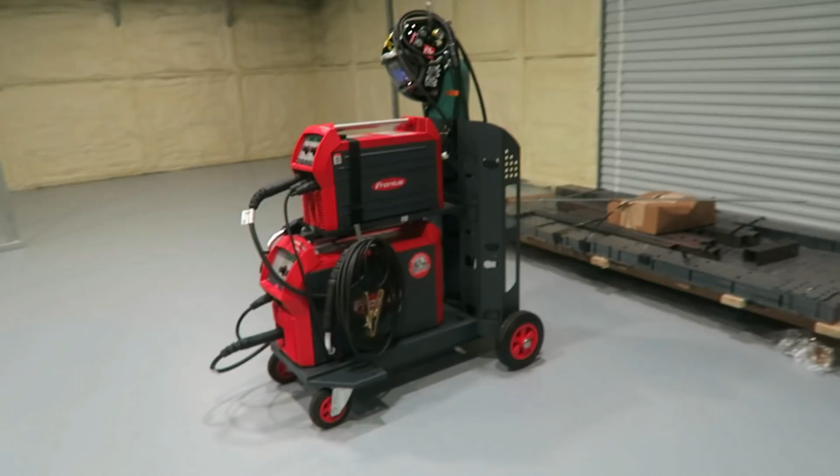So I've got two of the MIG machines in. That's mainly because I plan on putting this thing together.

I have finally unwrapped the welding table. One of the things you'll see when I put this thing together - obviously that'll be a separate video - but I had this thing specially made. The legs on this are only 30 inches tall. No, the whole table itself is only 30 inches tall, so it has really short legs. I did that on purpose - I kind of wanted a low table, something you could sit at and weld.

I also wanted that because I really plan to use this more as a chassis jig. I'll probably build ends for it - ends that come off one side for front suspension, and a whole other jig that comes off the back side for rear suspension.

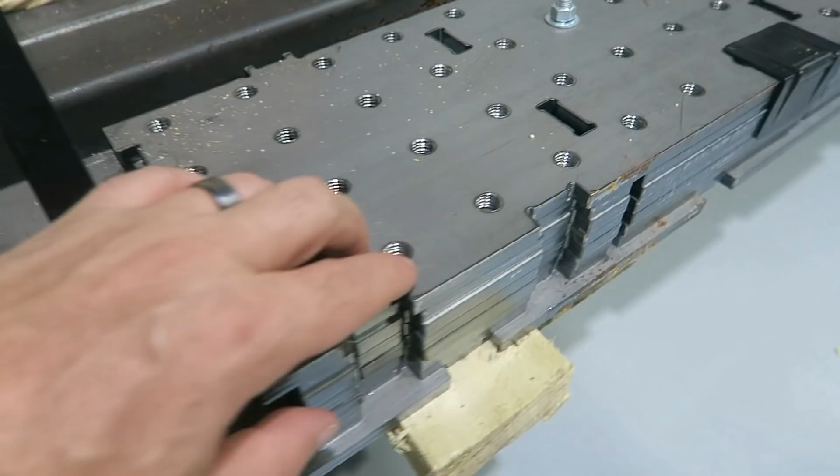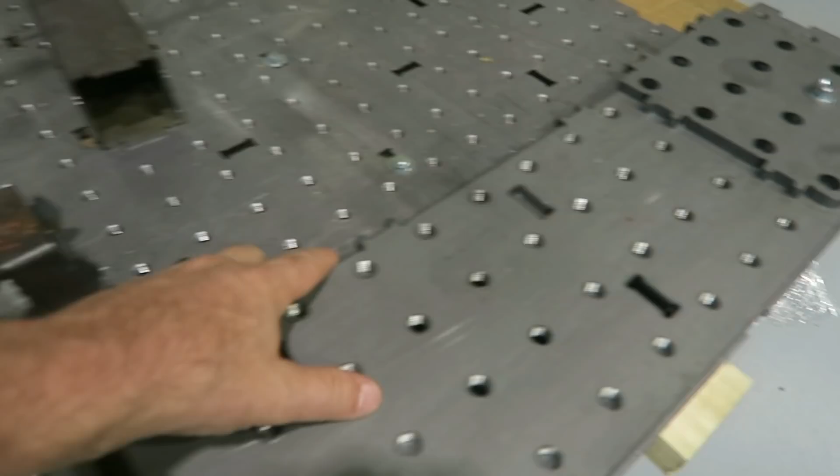The other thing I custom ordered on this thing is everything is drilled 1/2 inch thread. You can see that just about every hole on this thing, other than some of the plates that go on the bottom, is all 1/2 inch thread. See, there's one of the legs.

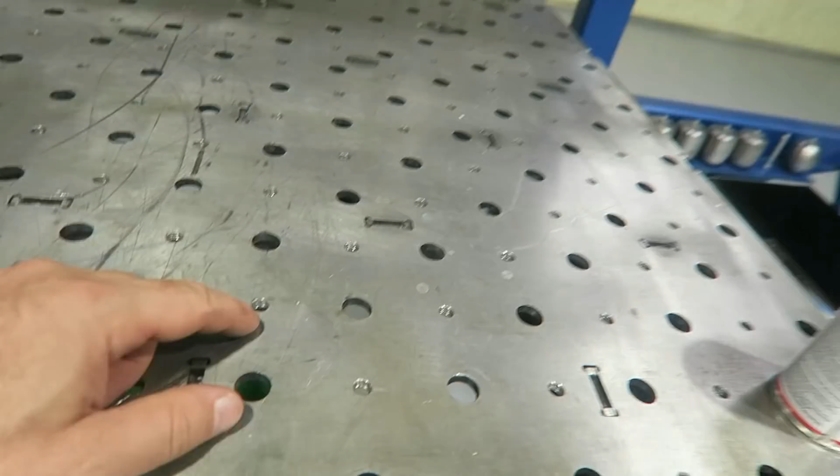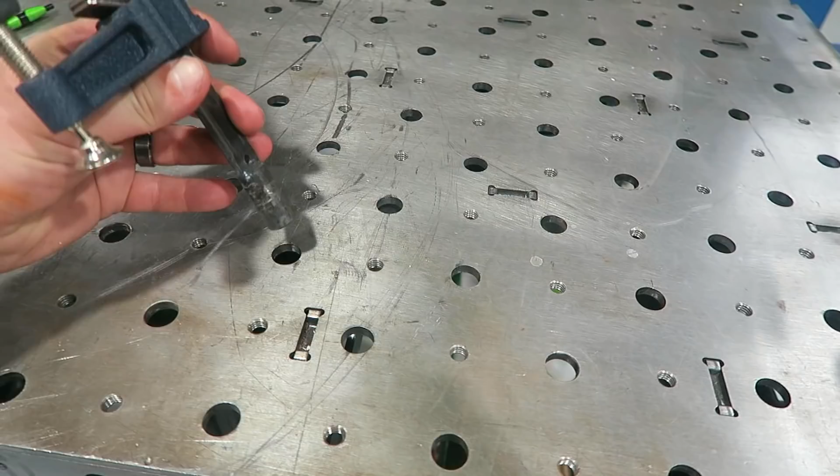Versus the other welding table, which is threaded and has these 5/8-inch dowel holes. Now the dowel holes make sense because when you're using speed clamps, these things just slide right down in there, and as you tighten that clamp, it kind of binds in that hole. They work really well - I like it for this table. I actually use the speed clamps more than anything else.

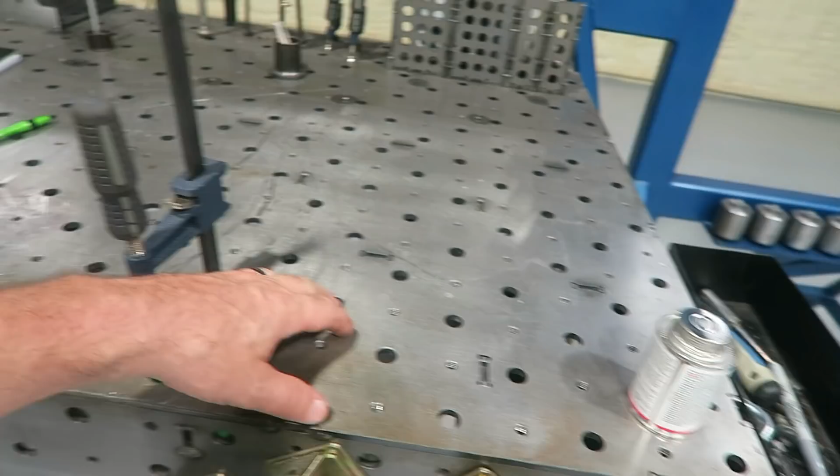But because of the nature of that table, I didn't necessarily want that. I wanted everything to bolt and mount - I can fasten stuff, fasten jigs, clamp tubes in there, all that kind of stuff. I want everything to bolt together, so that's why I ordered it all thread.

What else? Got lots of stuff. Even though it doesn't look like lots of stuff, I got like half of the other shop in here already. I'll get to that in just a second.

One of the things I wanted to show you is I got a dehumidifier in here.

So basically what you want is to maintain anything under about 80% humidity. That way you can combat surface rust on bare metal stuff. So I got this, it'll be a main staple right now. I just got it on the floor, but I'll build a permanent home for it. I've already got it draining outside, so you can see it just drains right out there. I've got it set to kick on at around 70 or 75% humidity right now.

The other thing that's rad about this shop, that I knew but didn't think would be this good, is it can be 80 degrees outside, and the way this foam insulation seals the place up and insulates it, the concrete keeps it cool in here. I need to get a thermostat to check the temperature, but I'm guessing it stays in the 70s all the time, no matter how hot it is outside, as long as the door's shut. It's like a nice, comfortable 75 degrees in here.

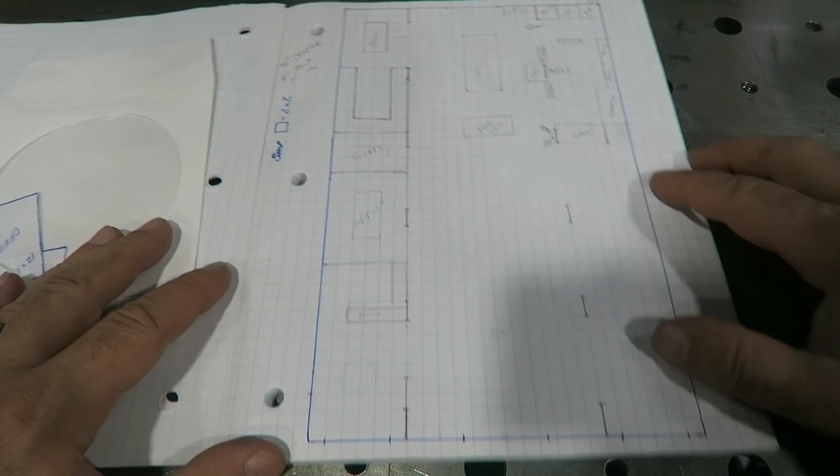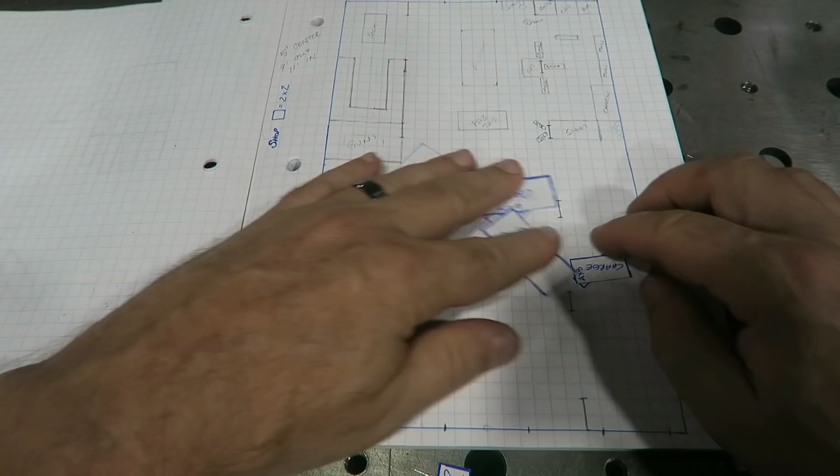But this layout thing is one of those where it's still what I'm gonna do, though I've already kind of started doing it, so I can show you. When I started building this shop, one of the first things I wanted to do was visualize where everything was gonna go. So I got some graph paper, laid the shop out in scale, put the posts in there, and got everything drawn out. Then I measured a lot of the stuff I've got that I wanted to place.

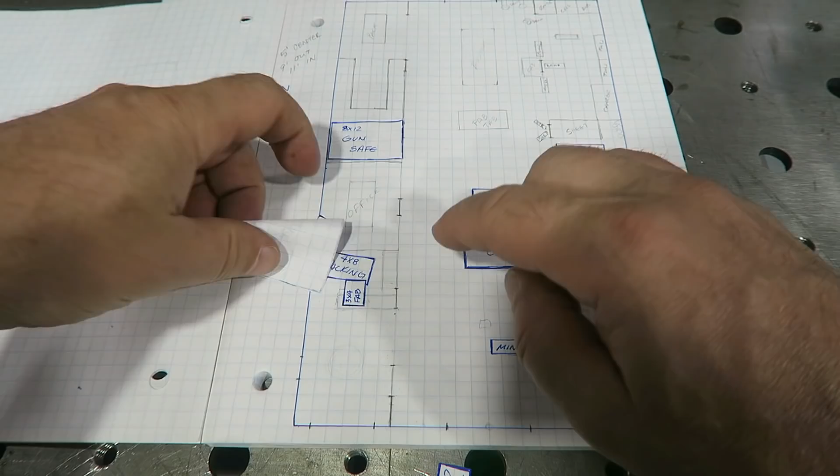So like, that was the mini chopper. That's a charge table, which I haven't really talked about much yet. There's a car, and another car. Sheet metal table. Gun safe. Office space. So you kind of get the point. There's the fab table over there on the floor, there's the one we're on right now, and the packing table.

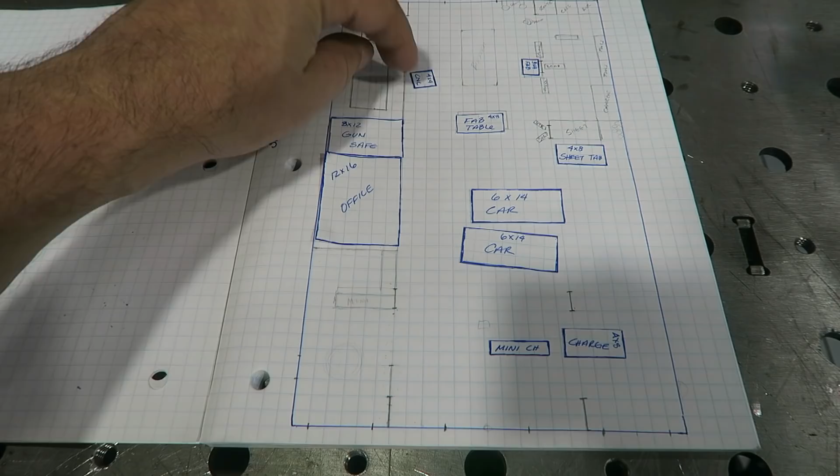And I even made me a little CNC machine that I don't have yet. So anyway, this was kind of how I would lay it out and figure out where I wanted things to fit within the shop, without drawing it on paper itself. I could kind of put a car in here, see how far it stuck out, how well it fit between the posts, how well it was going to work with other stuff.

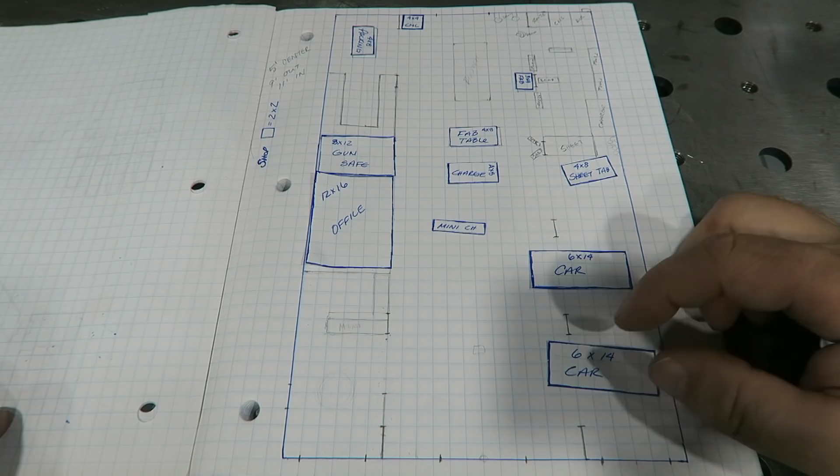And so what I came up with is kind of what you see here. I'm sure it'll change a little bit. So what I wanted was, I want basically my whole workspace to be back here in this corner. All my tools and equipment to be back here in this corner.

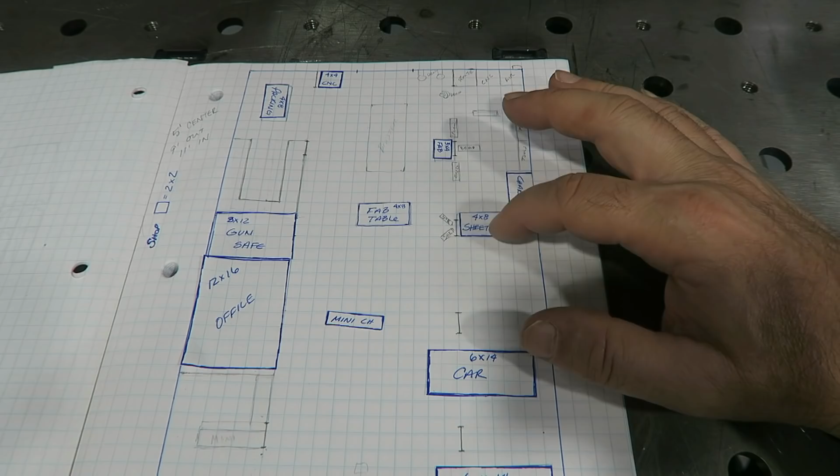I want a full-size 4x8 sheet metal table, no more working on pallets. I want something I can lay a whole 4x8 sheet of aluminum or steel on. It's low enough and a good surface where I can work it, and I can even store some scrap pieces underneath it or whatnot. A charge table - I need a charge table for all my power tools, all my camera stuff.

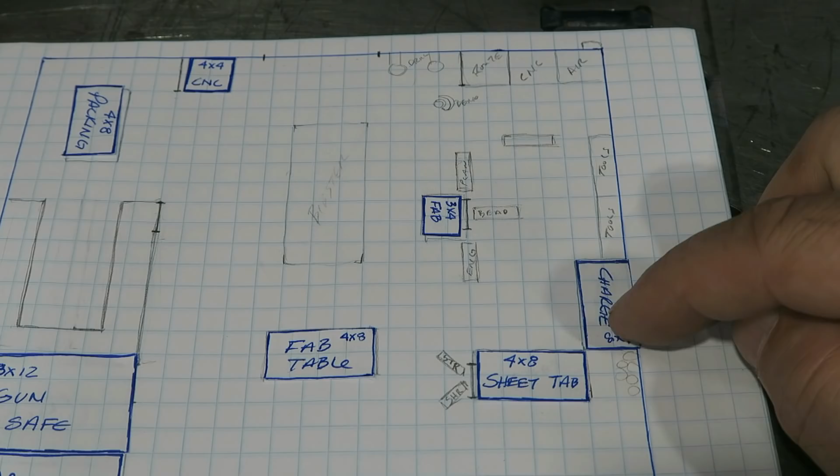Drones, you name it. I need a place to be able to store it. So I was kind of thinking about putting it like right there. I've got some ideas on how I'm going to build that. It's not going to just be a flat table. You'll have to kind of wait to see.

So then I got the 3x4 fab table, which is where we're at now. English wheel, bead roller, planishing hammer. Probably put the sheet metal brake here. Air compressor in the corner. Probably encase that in its own room.

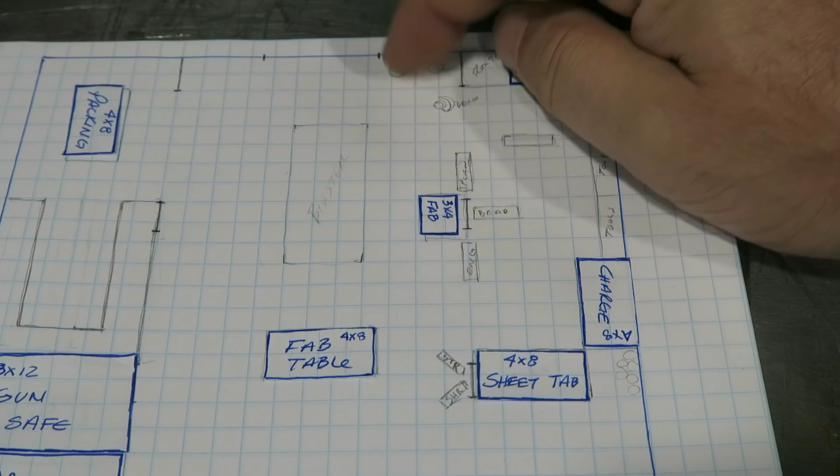CNC plasma, I think, is what I had here or there. And then I've got the CNC router that I'm gonna put in. Drill press - that's the actual door there. And then maybe do my bender right in there somewhere. Toolbox, tanks - argon, oxygen, acetylene, all that stuff.

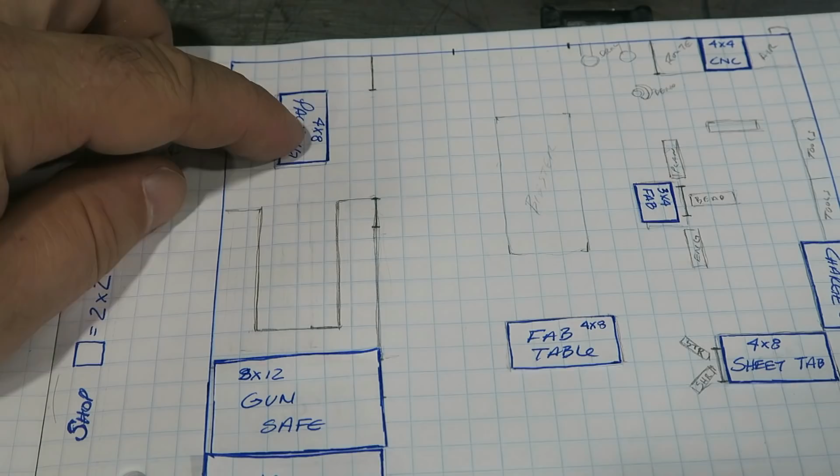This whole side of the shop, I kind of want to do a packing table over here for Kill Fab orders. May put it against the wall, may put it out here in the center. I'm actually going to put a wall in here, some form of wall, maybe like a chain link fence or something where it kind of looks cool.

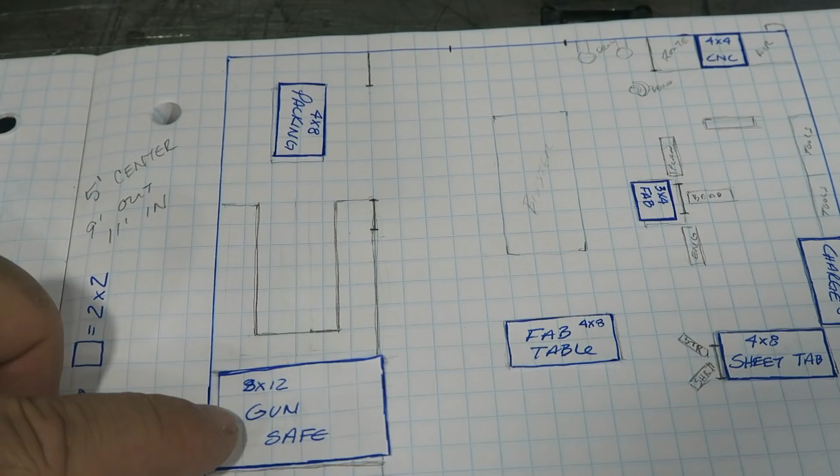And then all this is going to be storage. Originally I was going to have a walk-in gun safe right here. I think I'm going to take that out. And so this storage will actually come all the way down and over, and it'll just be parts bin storage.

When I'm working on a project, I'm taking the dash or interior out of it or parts off an engine or whatever, I can go take it and store it back there. And you don't see it - you're not going to see it on film, you're not going to see it if you're here in the shop visiting. It's not going to be laying in the floor, you're just not going to see it. I'm going to have a place to put everything out of the way, out of sight, out of mind. I can also have stuff very organized.

So my plans for the future are for Kill Fab to not just be a clothing company. I want to start doing fabrication based parts and bracketry and fabrication tools and all that kind of stuff. So all that stuff can be housed back there as well - you can order that stuff on demand. I haven't got there yet, but I want a place for all that, and that's where I'm gonna do it.

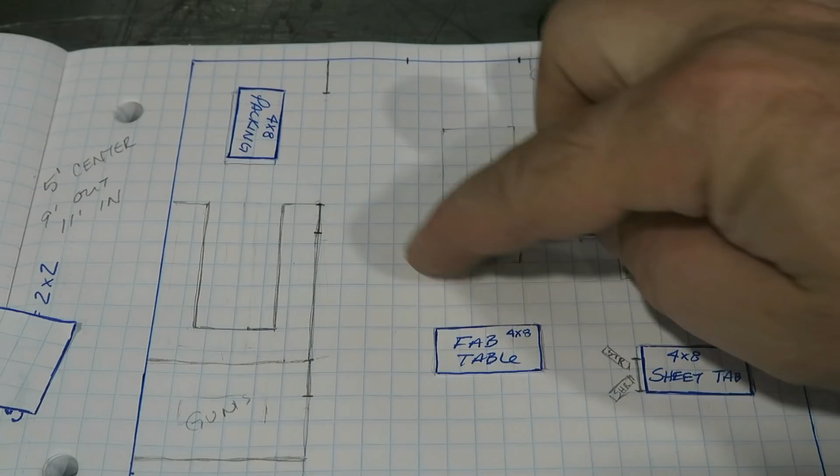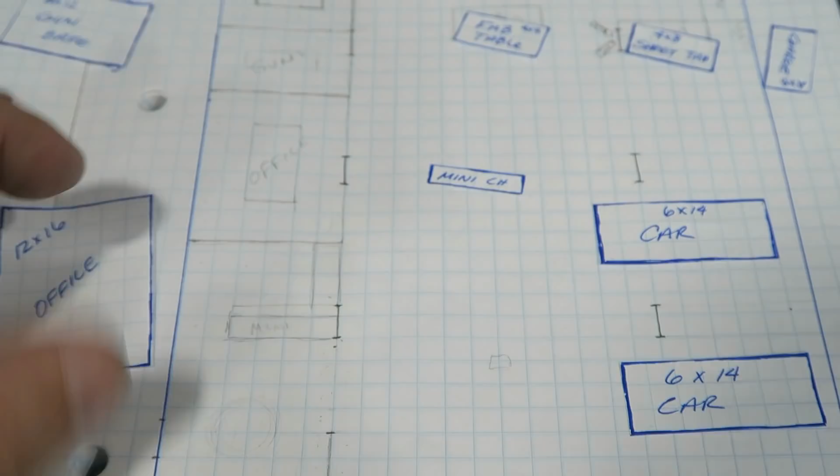So the front, I want a lounge space, that's where the couch was. I want an office style setup, conference table, may do a podcast. This will be fully enclosed, and I actually want this whole section to kind of look like a shipping container. That's the idea, that's how I'm going to build it.

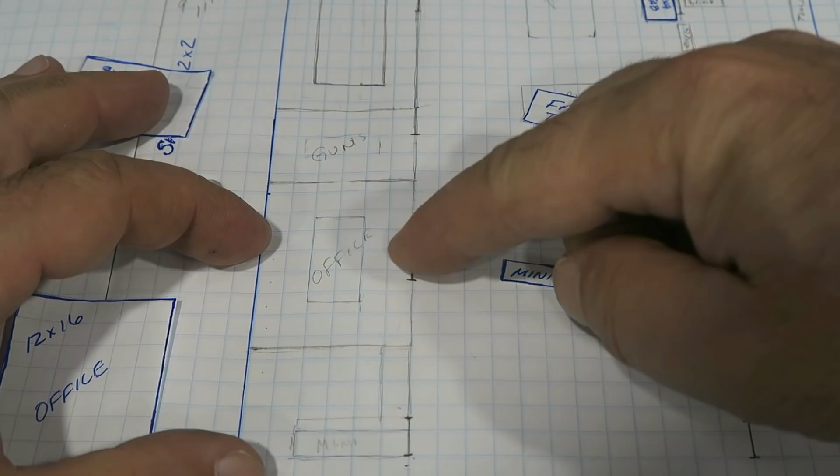Probably going to move this up some, right there, so it'll give me more storage space. So office, conference table, podcast stuff, may make it to where the outside flips out, put a bar in there so I can have events or whatever. And then the couch, this will just be all lounge space in here.

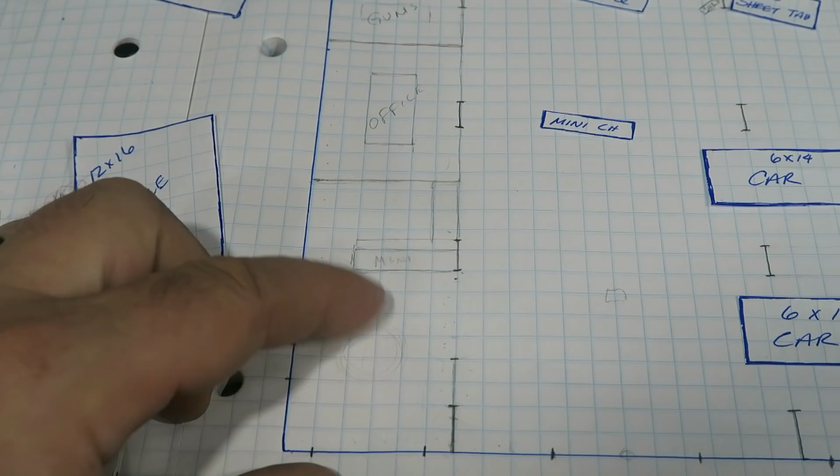I'm gonna do kind of a revamp of the Harley Davidson table, it'll go in here with some other stuff, and then put like a big sliding barn door style setup right here, mainly to block out the dust. It's gonna be a lot of dust in the shop, and I'd like to keep this place as clean and dust free as possible, including the office, so I'll be able to block it off.

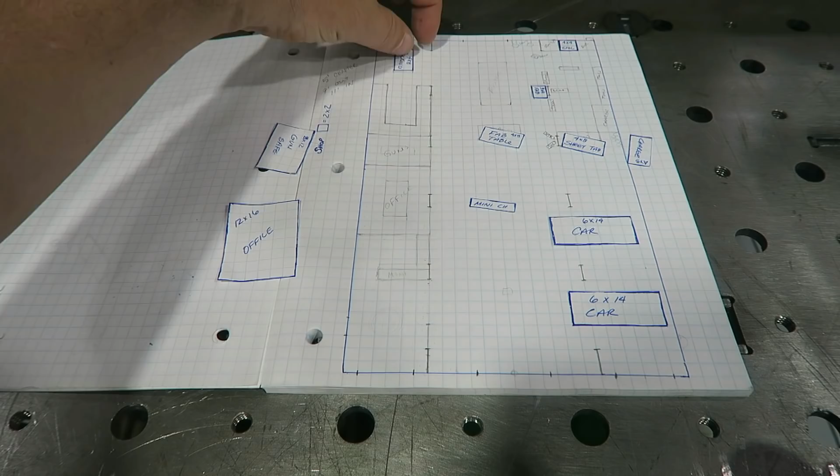Over this shipping container style office setup will be where I house the air handler for the HVAC and that sort of stuff, and then maybe do duct work that goes down either side or something. Everything else I plan to be wide open.

So right now the dually's here. I can park the Goose in here somewhere.

These center posts, where it's got 2 posts now, I may take those out and do one solid 4x4 steel post, just to gain a little bit more access around these cars. But really those are the only 2 that I think I'm gonna replace. The rest of these will disappear.

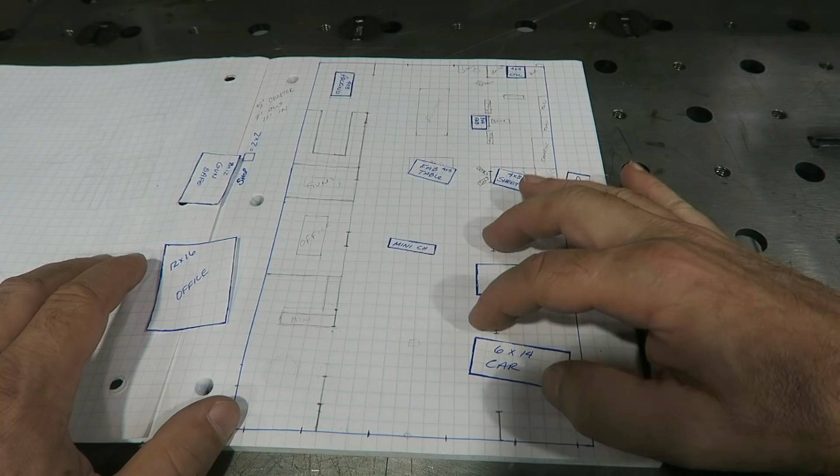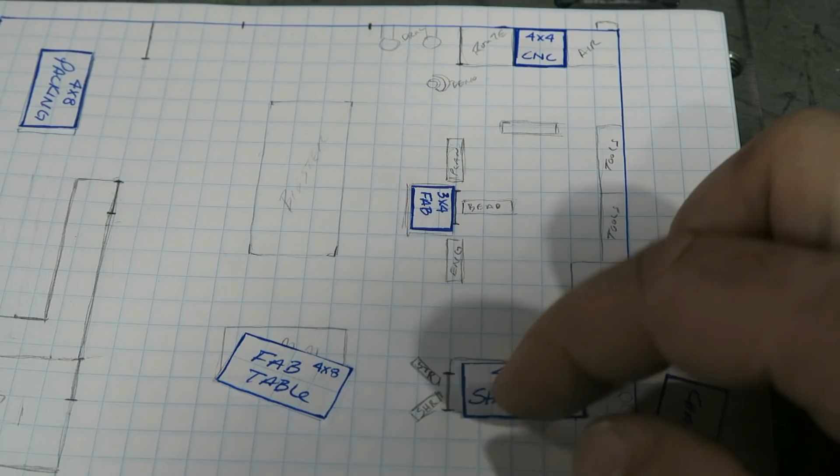So as I build these walls, as I build this shipping container, as I build this fence, all those will disappear. These up front, these over here where all the equipment is, they will disappear because I've got equipment around them, and I've got a table next to it. Maybe do a trash can or something right there. You'll kind of see, I'm gonna show you in one second how they disappear very fast.

One of the things I got a lot of pushback on when I first started building this space was these posts, the fact that this shop was not free span. I got a lot of pushback with that from my friends, from people on the channel, from both sides.

But this is the thing, I've known some in the past who have shops so full of stuff that all they have are pig trails to get around it. I'm kind of guilty of that myself. I'm gonna try not to do that.

I'm not going to do that in this space. But this is the thing, you're gonna pay all this extra money for free span, and then you're gonna put all this stuff in there that's just gonna pile up around these posts, and it wouldn't even have mattered. So that's point number 1. The second point is, if you can incorporate the post into the design of your shop, then it's not gonna matter, and you just saved yourself 20, 30 thousand bucks.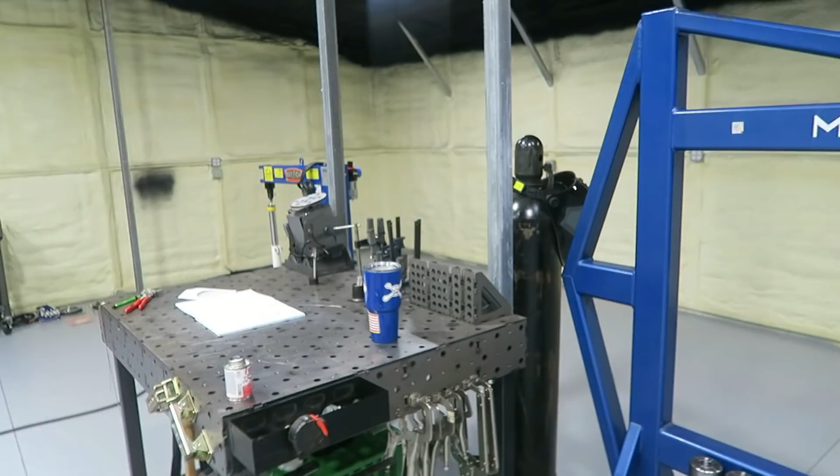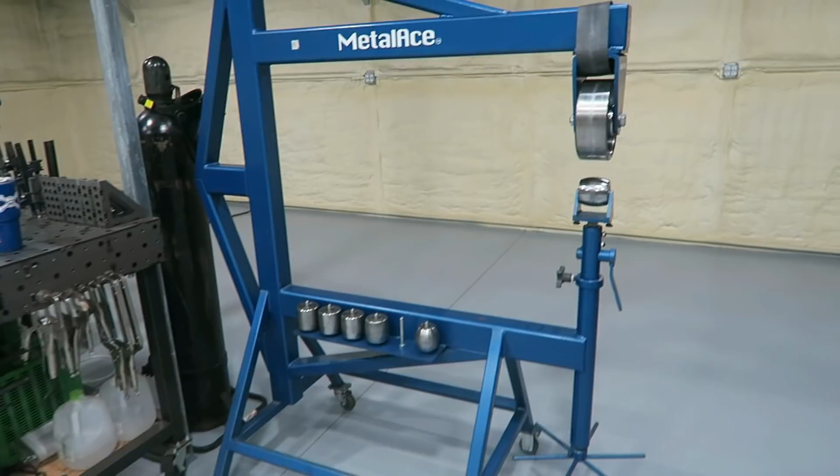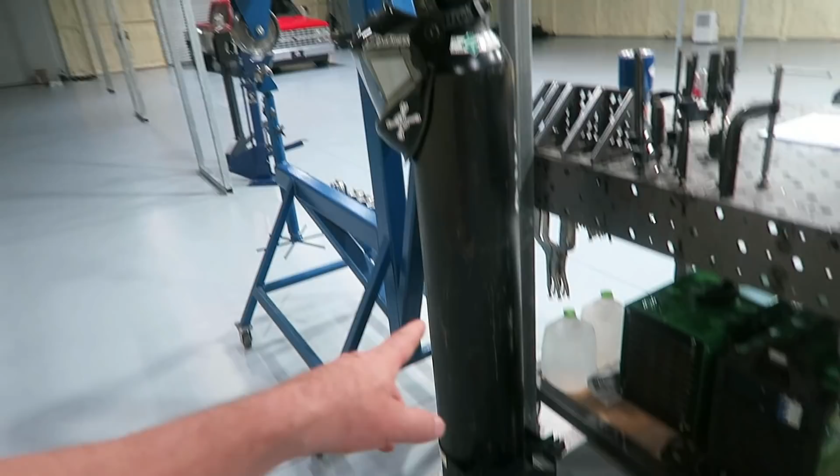So for instance, there's 2 of the posts, right? Fab table, English wheel on this side, planishing hammer on this side. I'll probably do a couple bottles of argon, I have these mounted in here and probably chained up to this, and then probably gonna have my bead roller right here.

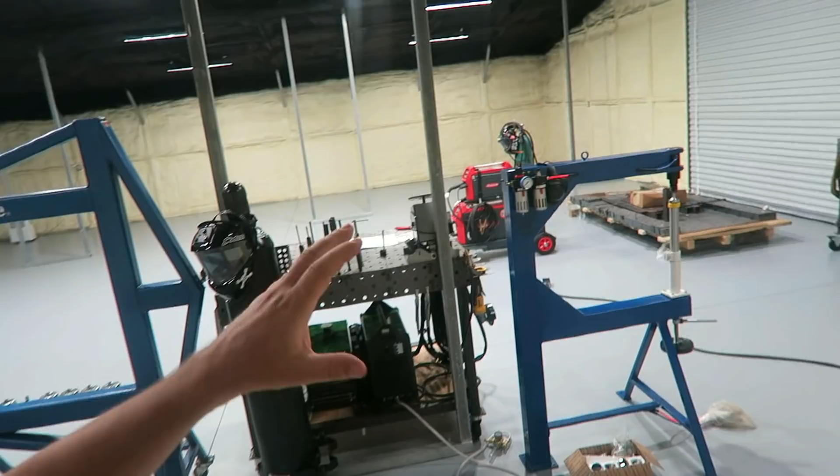And so I kind of got my star workspace, I can kind of work around. And then those posts themselves disappear. Doesn't really matter that it's not free span. If it was free span, I would have still had all this stuff around there and it wouldn't have mattered.

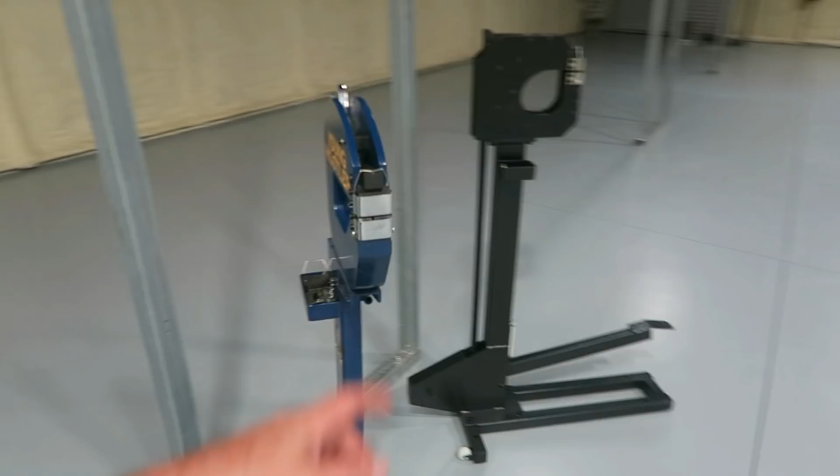Same thing down here, shrinker stretcher, got them at 45 so you can fit pieces of metal in there. These will fit kind of like if they wrap around. Probably put a trash can in the center of this post.

And then what I plan to do is on the back side of that, build a sheet metal table, one long sheet metal table. It's going to do two things: break up this space from that space, and give me a place to work. So you come over here, cut some sheet metal, do whatever you need to do. It goes right from here onto the English wheel, the shrinker stretcher, the planisher, wherever it needs to go, the bead roller, right, it's really close. It's one big kind of flow. This side, toolboxes.

Compressor is going to be here in the corner, and maybe a plasma table right here. I gotta figure out what I'm going to do with that one because I didn't have it in the plan. The plasma table I was speaking of is a CNC plasma, kind of on my list of things to get. Then drill press, drill press, drill press - I'll probably have 3 of them, each set up to do one function that I do a lot. One will be for notching only, for tube notching, and the one next to that will be something else. Just try to make things fast.

So anyway, I'll quit ranting about the free span versus not free span. That's kind of my take on it.

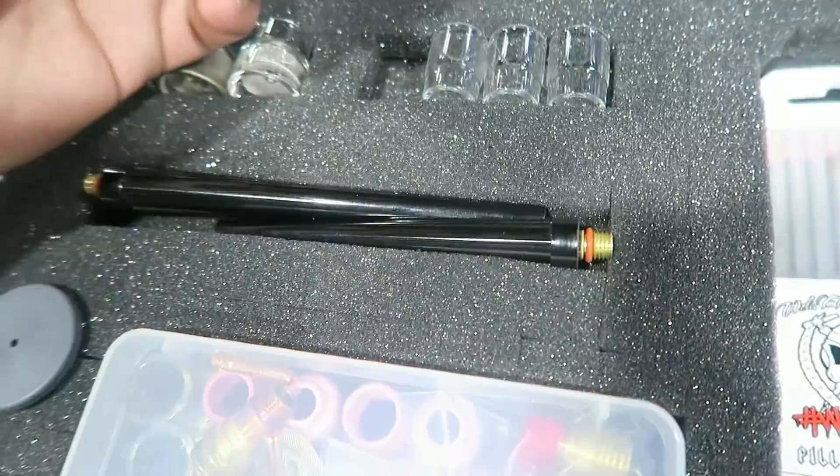So I made this little TIG welding survival kit. Obviously like 95% of everything in here is Furick stuff. So you got the FUPA 12s in ceramic, you got the FUPA 12s in glass - these are the 8 cups that Furick makes. Then you got the Moose Knuckle 14, ceramic and glass. You got the BB Dub in ceramic and glass.

Screen install piece. And then I don't know what Furick calls these, but this is for really exotic metals where you need extra gas coverage. Extra piece of glass just in case I break it.

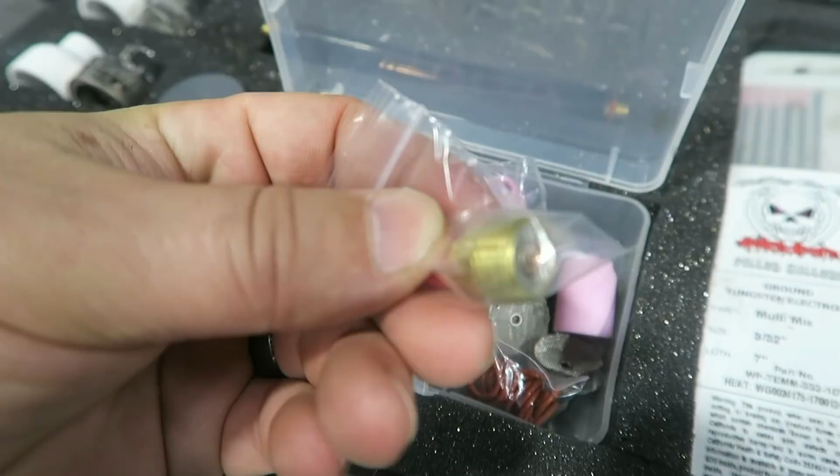And then for everything else, this goes in here - all the O-rings for all the glass cups, a bunch of extra screens, a bunch of extra diffusers, even a bunch of extra 8 cups we got in here.

And then a tungsten pouch, which I only got one pack. I got the weld-porn pink stuff in there, multi-mix. But I got enough where I can stack a bunch in there if I want to.

And then all this is just a tool case that I got off Amazon that has like the little punch outs, the little square punch outs. I think it's True Precision Tools.

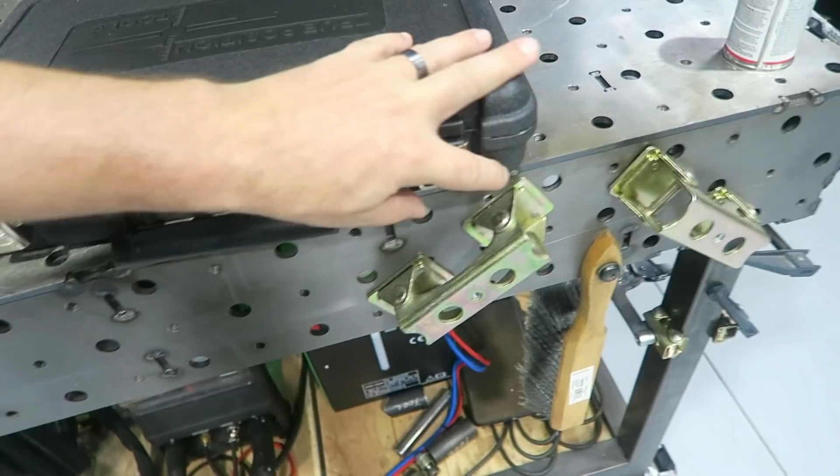Just a super easy way to kind of keep track of all your TIG welding stuff. If you're like me and you got a bunch of that just piled up somewhere, I felt like, you know, my kind of new thing is I want to be as organized as I can in this shop, and this is how I kind of started with that. I want to get in that mindset.